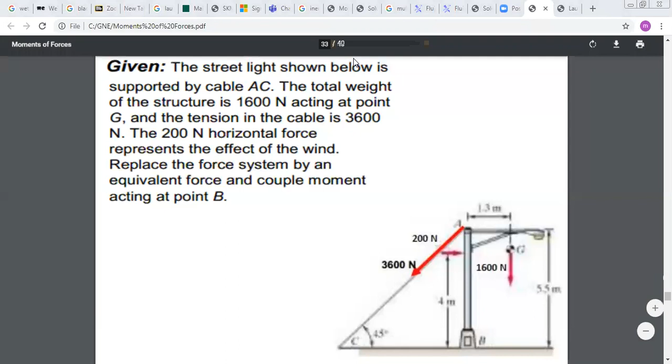So here I have, let's say this is force 1, F1, this is F2, and this is F3. So you will say that the F resultant vector is equal to F1 vector plus F2 vector plus F3 vector. Now, if you have a vectorial equation, if you want to find the resultant force F, what should you do? You can project on X and Y.

So you will say that Frx is equal to F1x plus F2x plus F3x, and the same for the Y direction. So in order to find your resultant force, you should find the components of each of your forces and do their addition. Once you find Frx and Fry, you can calculate the magnitude of your resultant force and the direction of your resultant force.

So what is your problem exactly? You don't understand why we do the summation of forces? And what I'm going to do with the resultant? What I am going to do with the resultant, I can say now that I can reduce my system to only one force. So if I put the resultant force here and I add the couple about B, I can say that the two systems will produce the same effect.

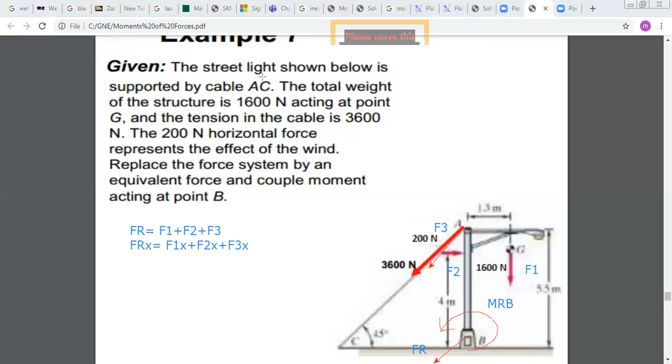So if you don't choose B, if you decide to choose A, what will be the difference? The only difference will be the moment, because the resultant force vector is the same, whatever the point of interest. So if you move all your forces to A, you have the same forces. So when you do the sum of forces, you will get the same resultant Fr. But when you do the sum of moments about A, you can get a different couple. This is why you will end up with a different couple here, but the same resultant force. So here you will have Fr, and here you will have M resultant about A.

And the whole idea is, instead of dealing with a lot of forces, I can deal with one force only and one couple, because they will have the same effect. Since we have seen together that if I move a force from one point to the other and add its couple about the point, I will end up with the same effect. This is why we say the systems are equivalent, because I can replace all these forces by one force, one couple. Okay?

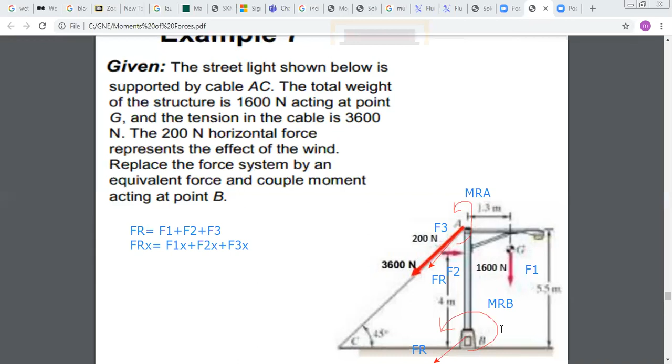And how do we find the force and the couple in the equation? From the equations, of course. To find the resultant force, you say first, what is the definition of resultant force? The definition of resultant force is the summation of forces. And since here you have a 2D system, to find your resultant force, you can first add the x components of all forces, and you find Frx. Add the y components of all forces, you get Fry; here you have a typing error, it's y.

In this way, once you find Frx and Fry, if we represent it here, this is Frx and this is Fry. Once you find them, you can calculate the magnitude of your force. The magnitude of your force can be calculated as the square root of Frx squared plus Fry squared. You get the magnitude. And in order to know the direction, you can represent it by the angle theta.

As we said here, both x and y are negative, so you are in the third quadrant. And to find the direction, you can define this angle, which can be calculated from tan inverse of Fry over Frx. So here, this is just Fry here. Okay?

Now, once you obtained your resultant force, we cannot stop here, because when you want to reduce your system, you want to choose a point at which you want to do the reduction. In the given, they told us reduce your system at B. So what is the idea here? If I reduce my system at B, I will move all my forces to point B.

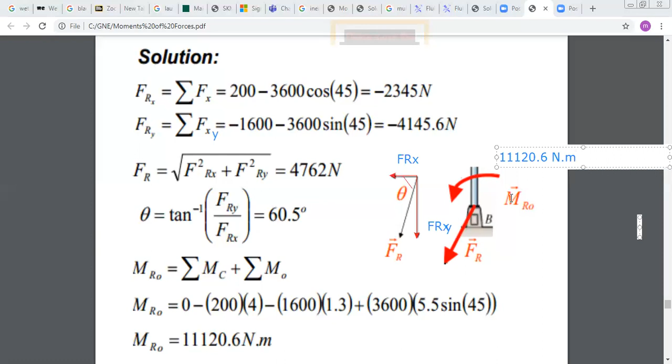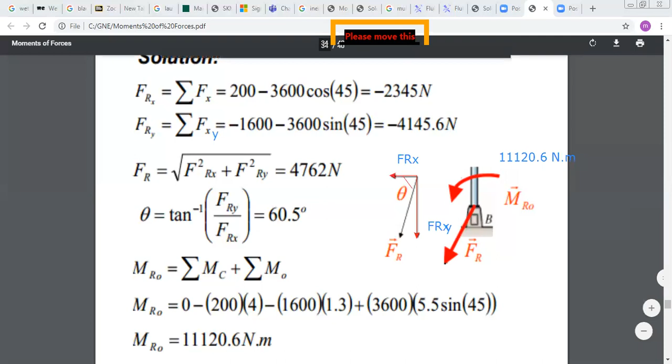11,120.6 Newton meter. And now, I can say that this system of force and couple is replacing the three forces I have in the problem. Okay? So I just reduced the three forces that are applied at different points to one force and one couple at one point. This is the whole idea here. So as you can see here, you have three forces applied at different points. I want to represent this system of forces by one force, one moment at B, and this is what I did. Okay?

Any other question on this? If, for example, I tell you reduce at A, what will be the difference? If I tell you reduce your system to point A, for the resultant force, nothing will change, okay? Because Frx will still be equal to sum Fx, and Fry will still be equal to sum Fy. So Fr will remain the same.

What will change is the couple, because if I put all my forces at A, and I get F resultant at A, to have an equivalent system, I should add the couple of all forces about A. So I should add a couple. Now, it will be clockwise or counterclockwise. I should do an analysis to know if it's clockwise or counterclockwise. Let us assume it is counterclockwise, and let us verify if it is true or not.

I will say sum of moment about A equal to, first, the force of 3,600 Newton will not produce any moment about A because it's passing by A. You still have the 200 Newton force and the 1,600 Newton force. So considering that I choose the counterclockwise as positive, the 200 Newton force is trying to rotate about A in the counterclockwise direction. So it's producing a positive moment. It's equal to plus 200 times the distance from A to the force, which is equal to 5.5 minus 4 equal to 1.5.

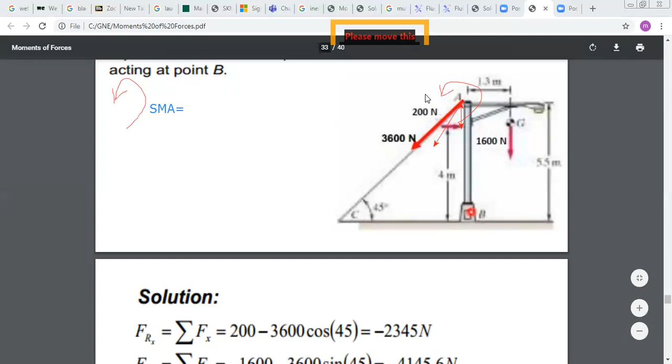Okay? And you have the distance for the second force, which is 1,600. The couple is in the clockwise direction, so it's negative. And it's minus 1,600 times this distance. It's not very clear if it's 1.5 or 1.3, but I should take this distance. So I will do plus 200 times 1.5 and minus 1,600, I think it's 1.3 here, times 1.3. If you solve, you will get a negative result.

Since you got a negative result, this means that your moment on A will be clockwise and not counterclockwise. So, either you put a negative value near your arrow, or you change your arrow and put a positive value, because your resulting moment is not counterclockwise, it is clockwise. So you put the clockwise direction and you put the positive value of the moment. Okay, any question?